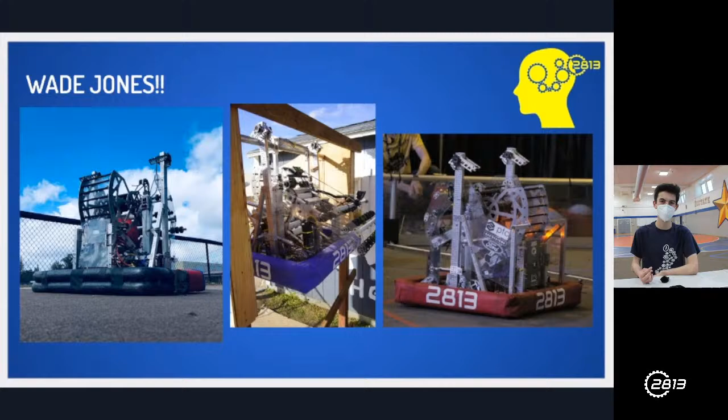So where does our tale begin? That's going to start off in off-season, August of this year, beginning of the school year. Our off-season began with 2 shipping containers and a construction site where our lab used to be. A little bit of backstory: the school had to take down our old lab because they want to make a new lab, and in return we have 2 shipping containers where we have machining, storage, assembly, and robots lab basically. So that's where we are this season.

We used to have a practice field that the school gave us, but it kind of fell over after a couple gusts of wind, so it was not very sustainable. Spoiler for ahead, we got a way better field, this small gym right here, just outside of our lab where we just take out and unroll our carpet every time. That was very nice.

Here are a few images during the off season. Every year we invite new rookies onto the team, and during the off season we teach them the skills they need to know to be useful during the build season, which is when we actually build our robots. So here we have some rookies assembling a table. Here's some other rookies learning how to use the mill. This green machine over here is called a mill. And here are a bunch of rookies learning how to wire the robot.

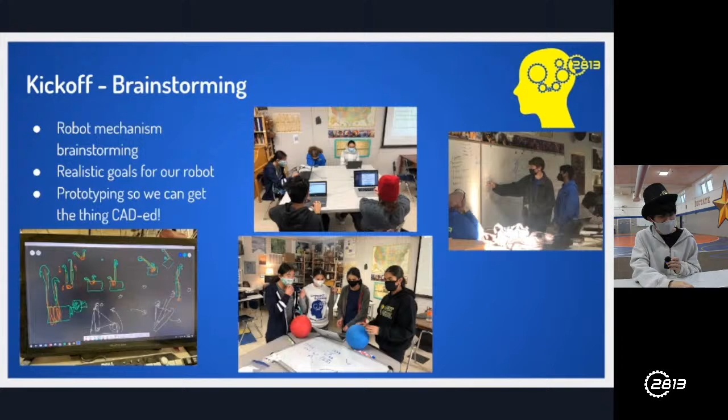Alright. We should probably take our masks off in front of the camera. It's probably fine. Alright, none of the videos are loading. That's a bummer. Okay, well I guess we'll skip these. I was not expecting this to happen.

But effectively, we did a lot of prototypes. We made wooden mock-ups of all our mechanisms. Again, as Yuta said, it's very useful. It allows us to figure out the flaws of our design earlier and then make a better one when we make the actual mechanism out of more expensive materials like metal and plastic, and use real motors instead of drills.

Do you want me to do it? Yeah, I can do it.

All right, so we start off the season with week 1 and 2. Initially what we did was we got the drivetrain done. That effectively just allows the robot to drive on the field. Without the drivetrain, you really can't do anything. And we actually made 2 drivetrains that were completely identical to each other, so we could use them for drive practice - that was the Playground Monkey, the name of our practice bot. We just use it for a lot of practicing.

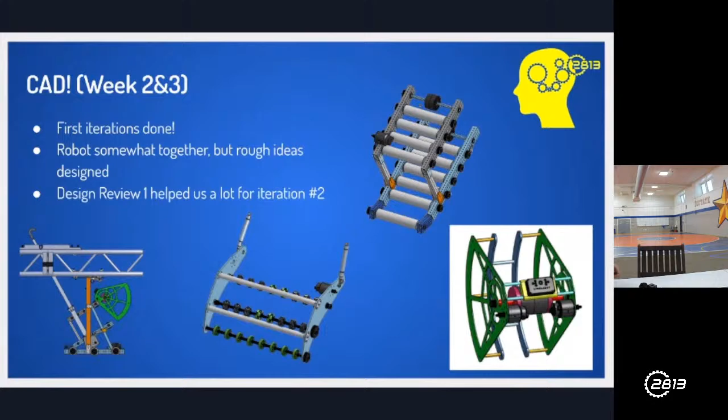Okay, and after week 1 is week 2, that's how numbers work. So next up is week 2 and 3, that's when we started doing CAD. So everything that we've been prototyping leads up to what we design finally in 3D modeling, and then finally what we assemble into the final product, which is our beautiful Wade Jones.

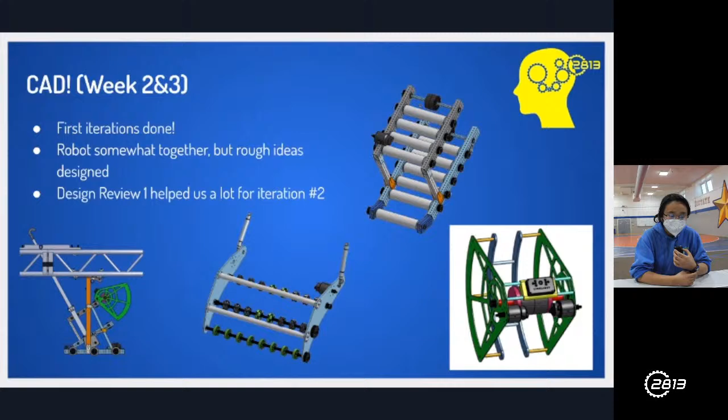So week 2 and 3, we had our first iterations done in the CAD, as you can see here. The robot was somewhat together at that point, which was probably a good time to have a design review, so we could make sure that we're on the right track, we're making things correctly. And thank God for that, because we had a lot of iterations due in iteration number 2. As you can see, things got a lot beefier, so that made our robot a lot better in the long run.

And then a lot of these, especially with intake - I'm going to call that one out - intake had a lot of iterations. We got a lot of people to crash test it multiple times. So that was really fun to do, and a lot of redesign, but it's really cool now. We'll talk more about it later.

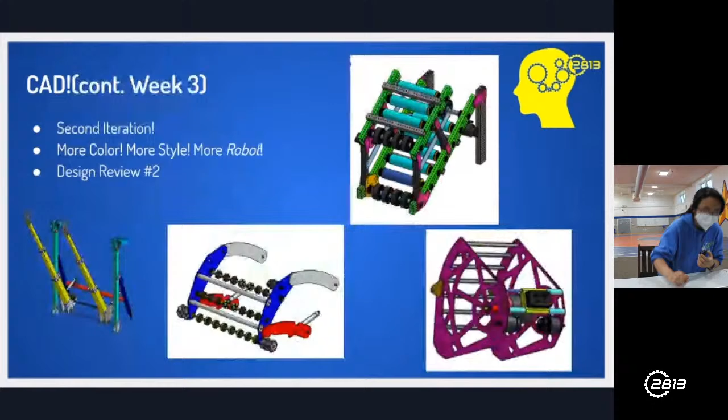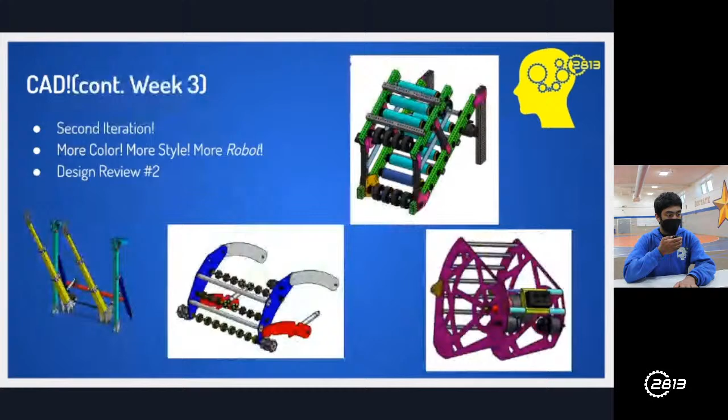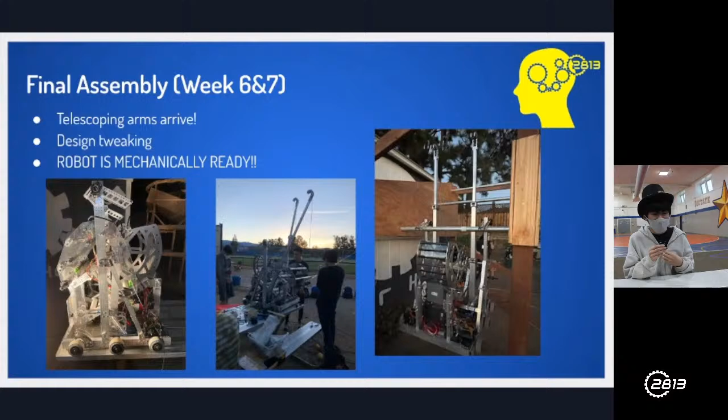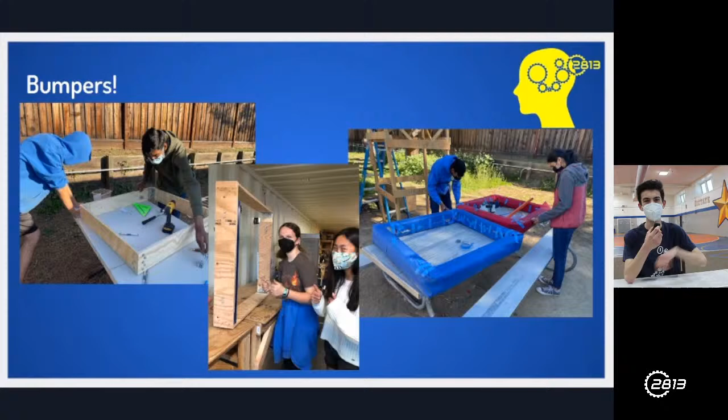Oh, the YouTube videos work. Yes, alright, you want to do it? Yeah, let's get it. Finally, okay, alright.

Just in time too, because these are probably the coolest mechanisms, or at least climb is my personal favorite. So, okay, competition week 0 and 1, that's the time right after build season, because build season is 6 weeks long, and then you have a grace period until your competition, and our competition was week 2. So we had both week 0 and week 1 to keep working on the robot. And because it was mechanically ready, this was basically software's time to take the reins and do what they do best. So we're working - okay, here, look at this one.

There was a sub 20-second climb. Actually it was around 20 seconds, but we could have done a sub 20-second climb, which is really good for us because it's a lot of points. It was really great that we got that consistently down. We ran it like 15 times the day we got it working, so it worked really well, and it never failed in competition. And the next thing up was shooting.

Here's a short video of our shooting.

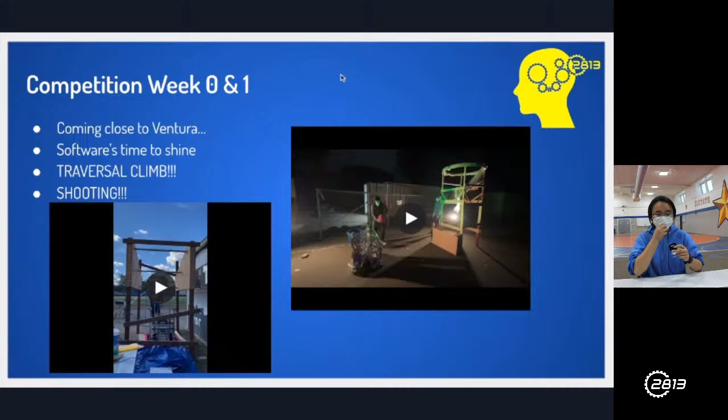We're good. Okay, I think I left off on shooting. I hope everyone got to see that awesome climb right there, but I'll talk about shooting again. So shooting, because we missed the intro video, this structure right here is what the target looks like this year.

At the time, the structure that we have didn't have sides on it, though, so those technically would have made it in, because you can see they just went under the hoop. In competition, they would have gotten in, which means our shooter was pretty much working at the time. We had to do just to make it more consistent, but overall, pretty all right for before competition.

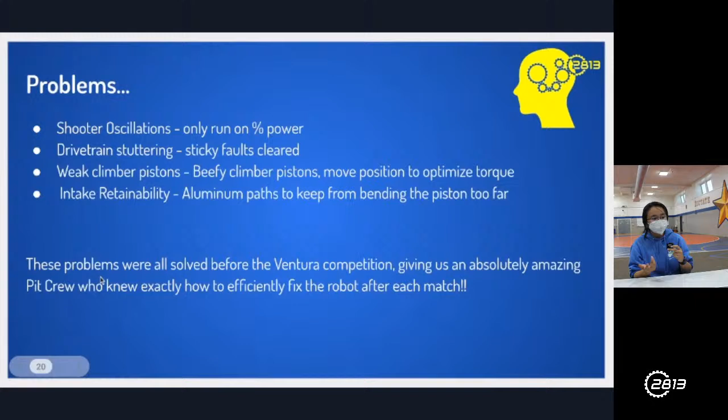All right, so yeah, even though we got some stuff working, there are still plenty of problems. One problem that we had was shooter oscillations. Basically, when our shooter was running, our robot would vibrate a lot, and that causes issues because that results in bolts falling out, and we don't want our robot to self-destruct when we're trying to shoot.

So our solution to that was to only run on a percentage of power, basically feeding the motors a percentage of the power. What we were doing before was running it at a specific RPM, but when we switched to a percentage of power, that made it smoother, and it's a lot easier to implement than trying to get it to a specific RPM. There wasn't much time before competition, so we had to resort to that.

Another problem was that the drivetrain stuttered, and this was fixed by clearing these things called sticky faults. They're basically caused when the battery becomes low, and we have to clear these every time we turn the robot on or replace a battery.

Another problem we had was weak climber pistons, and this was fixed by just getting bigger and better, beefier ones, and we moved the position of the pistons so that we could optimize the torque.

One last problem was our intake retainability. We did a bunch of stress testing, and we also went to a scrimmage. What we found out was that after a lot of collisions, our intake pistons would bend, and that's not ideal if you want the intake to work. So what we did was add aluminum plates to keep the pistons from bending too far.

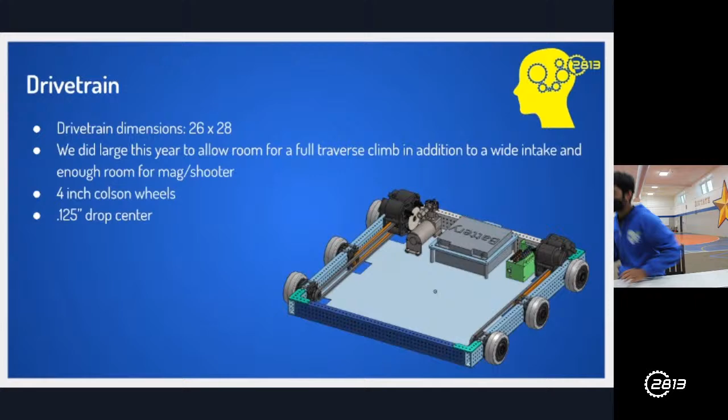All right, cool, let's talk about the specific mechanisms. I'll start with the drivetrain. The drivetrain dimensions are 26 inches by 28 inches, so that's more than 2 feet by 2 feet. It's a sizable robot, definitely nothing small.

You can choose how large you want your robot, you just can't do it too large. So you could have a tiny robot, or you could go to the maximum, which we were very close to, actually. There's a maximum size that your robot can be.

We wanted to do it because we wanted enough room to put all the mechanisms on our bot, including a full traverse climb, climbing to the highest bar, which you saw earlier. We also wanted a wide intake, plus the magazine and shooter. Those take up a lot of space, so we needed to account for that and make sure our bot had enough space.

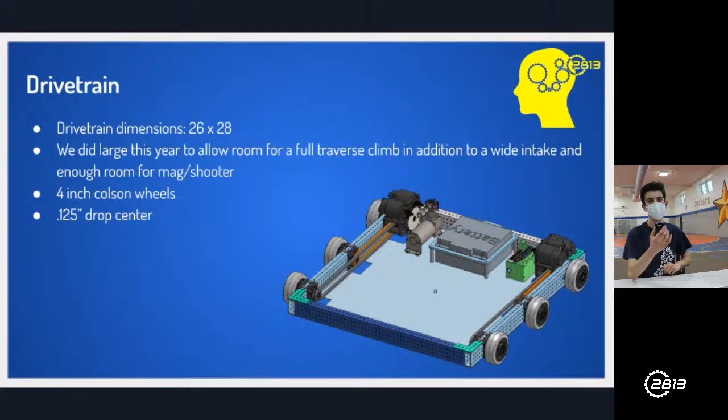We also have some 4-inch wheels on the drivetrain that are pretty good, and we have a drop center. Effectively, that means the middle wheel is a little bit lower than the other two wheels, which allows us to have a little less friction on the field. So when we turn the bot, it doesn't make the wheels want to cry, for lack of a better term.

Oh yeah, the gearboxes. We actually bought the gearboxes, and the reason we did that is because they're simple, we know they're going to work, and we can focus our resources into making unique, innovative mechanisms like our climb, which was a lot harder to do. We wanted to make sure we had a solid foundation for the drivetrain before going anywhere, and it works - that's kind of what we're looking for.

It also goes 15 feet per second at its maximum speed - that's really fast. So yeah, that's about it. I think there's a lot of technicals in here for all you FRC nerds, but effectively we have a lot of flexibility with the drivetrain, and it's very consistent and works really well.

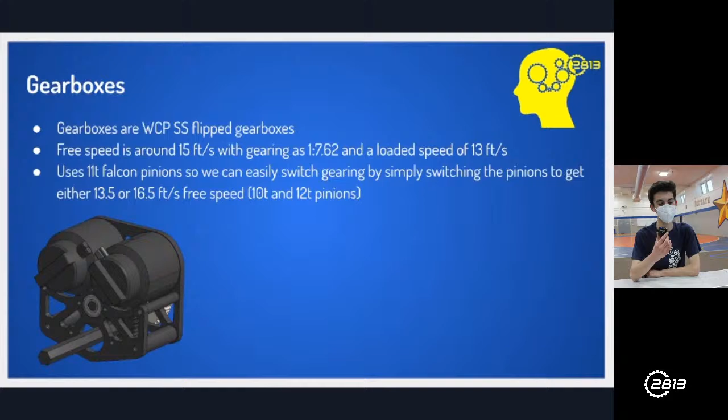All right, intake. Pranesh, would you like to do intake? Sure. Epic. Okay, so intake. Intake's pretty cool, I'll say this. These balls are huge, and because of this we wanted a wide intake because it's easier to pick up balls that way. So pretty much how our intake works is it's a 4-bar intake.

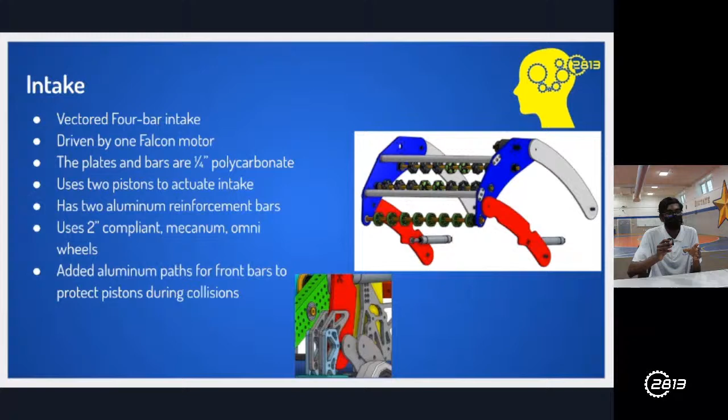If you look at the red bar and the white bar, those are the four bars. This allows our robot to essentially store our intake above our bot in starting configuration, because we need our bot to be within the specific size parameter at the beginning of the game. Then with our pistons, we deploy the intake, which allows us to pick up balls. The entire intake is driven by one Falcon motor, and the plates and bars are all made out of polycarb. We have these aluminum pads that allow the pistons to be a little more protected.

And yeah, we use compliant wheels and mecanum wheels. The mecanum wheels are basically these wheels that allow the ball to be centered so that it enters our magazine a little more smoothly.

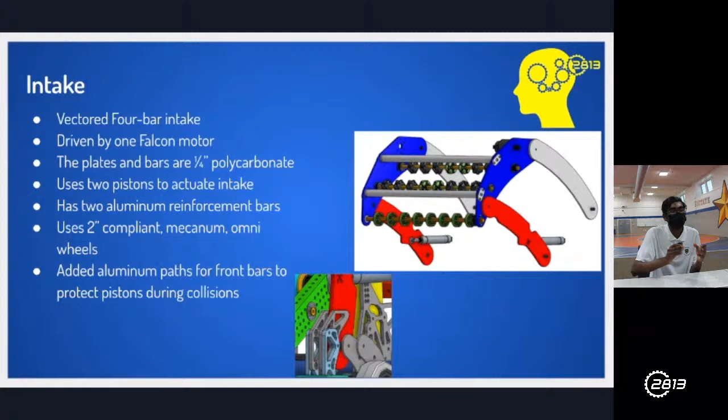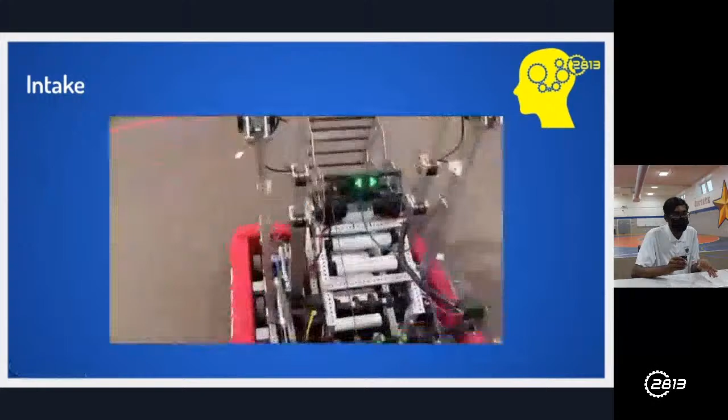Here is our intake being deployed. As you guys saw, it was on top of the magazine, and then it was on the ground. And here's the bot just driving around with the intake deployed.

Okay, now magazine. Ah, yes, my proud creation, my baby. All right, here we go. So, magazine. My mask is falling off, great.

Basically, the magazine is needed so we have a way for the ball to get from the intake to the shooter. The magazine is the mechanism that allows us to do that. For this year, we used PVC rollers - plastic circular roller things. You can kind of see it here. We have a bunch of them, and they roll to move the ball from here to here, and then we have the shooter attached here.

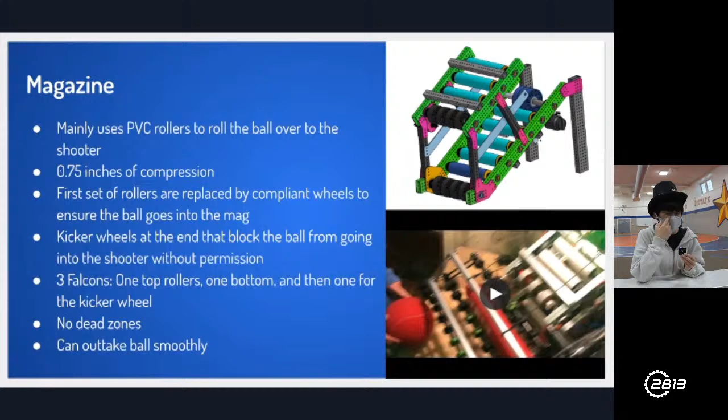So, to get a little more into detail, there's 0.75 inches of compression on the ball, for the FRC nerds, yes. The first set of rollers are also wheels instead of rollers because we wanted to make sure it has enough torque to get into the magazine to fully ensure it's going to go in instead of doing weird things. Then right here, the last one, instead of having a roller, we made it into a large compliant wheel - just a very squishy wheel, but large.

Yeah, this is basically to stop the ball from going into the shooter before we want it to. That was a problem we had in our last bot, and it works surprisingly well. So yeah, I'm pretty proud of my creation.

It's run by three motors: one on the bottom, one on top, and then this thing is run separately so that we can put the balls in when we want to shoot.

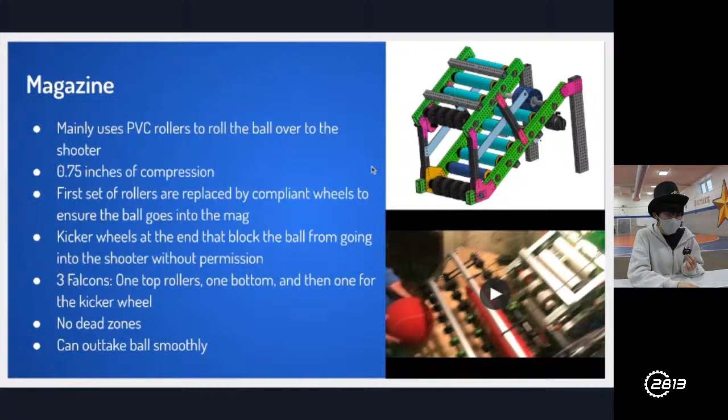As far as I know, there are no dead zones. Hopefully there are no dead zones.

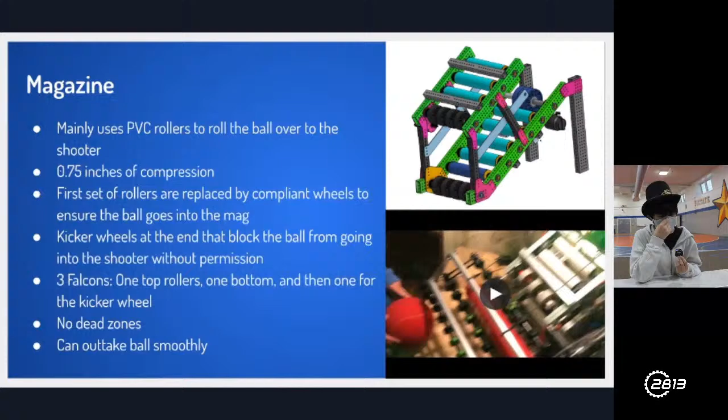Another thing to note, we can outtake the ball smoothly as well, because that's a major part of the game this year. If you intake the wrong color ball and shoot it, that gives the opponent points, not you. So if we pick up the wrong color ball, we want to be able to release it, and it can do that. Overall, it works, and I'm pretty happy about it.

This is a video of when it first ran. So that's what it does.

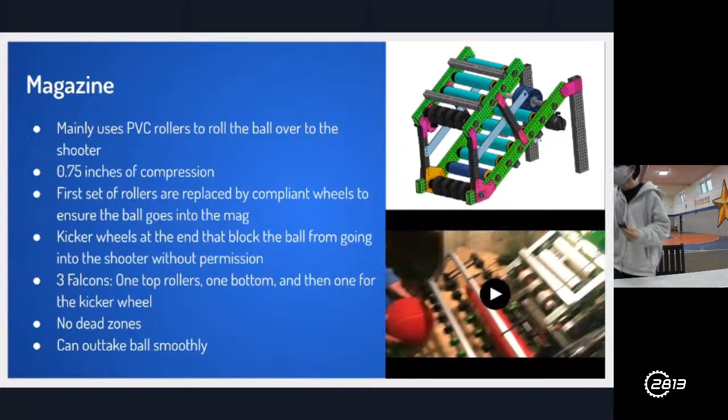That was the first time it ran, and guess what? I made it, but I wasn't there. Oh well, all right, here you go. Tisk tisk, could not wait to see. He just couldn't watch, couldn't be around when his baby was made.

Anyway, all right, time for my child. I made the shooter this year.

To go into specifics, the flywheel is made of a 4-inch urethane wheel, or two of them, and one 4-inch aluminum wheel between them. That's mainly to make it really heavy, because the heavier the flywheel, the less time it takes for the shooter to go back up to speed. It's kind of some inertia stuff going on there.

As Abhinit said before, we use percent power instead of RPM control because PID tuning was having a little bit of trouble. We were having oscillations, which means our shooting wouldn't have been consistent if we used that at the competition. That is a future goal though, we're working on it, and it's gonna work. I have confidence.

Also, future goals for the shooter: at the competition we had a fixed speed, which means we could only shoot from one spot on the field. But our goal for the next competition, which is in two weeks, is to shoot based on auto aim.

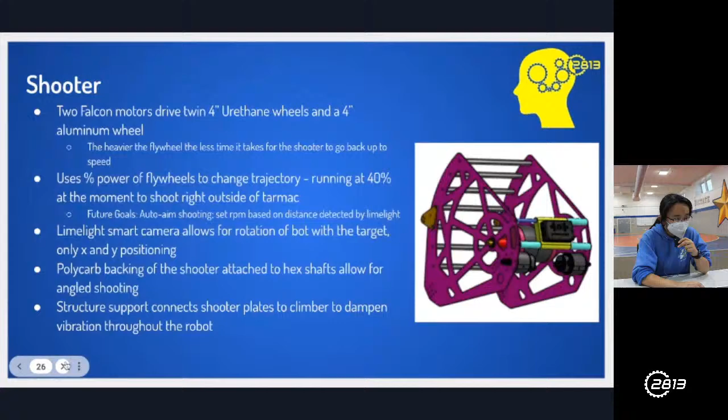And of course, what is this? Oh right, we added in a new thing recently, a structure support here on the shooter, which would dampen the vibrations we were talking about earlier. Basically, when we ran this flywheel, it would vibrate the robot a lot, so we connected it to the climber mounting piston structure, and that dampened the vibration a lot. That was really helpful.

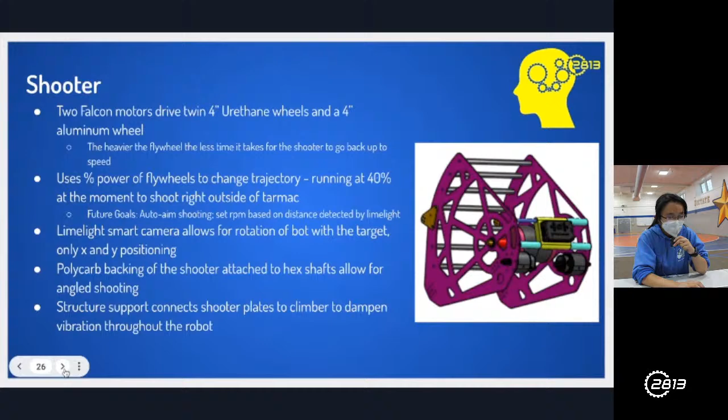Right, and a little bit of demonstration. I think this is the same video I showed before, but this is us shooting for the first time.

Pretty neat. And then I just added this in here because we went to the competition last week, so we have some footage of us shooting in the actual game. Hopefully this works. No! There we go.

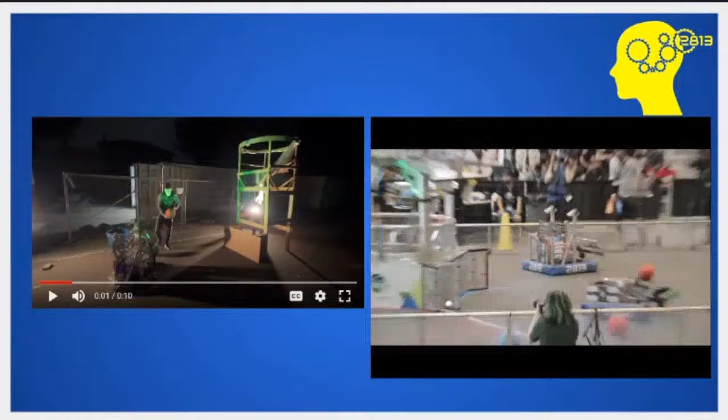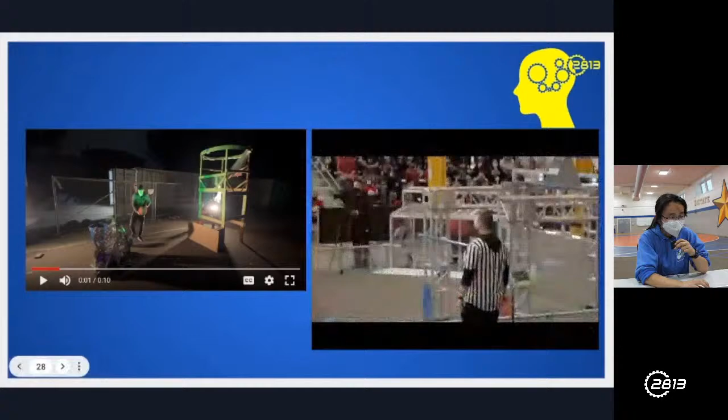Look at that beautiful shooter. So consistent. There we go. All right, climber next, Caleb.

All right, let's look at the climber. So climber is, in my opinion, the coolest mechanism on the bot, but I also designed it, so I might be a little bit biased. Hallie agrees, it is the coolest thing.

That's really good. We went for simplicity for this climber, and it worked out because our climber was very consistent at competition. Almost every match we were able to at least climb onto the second bar, most of the time we were able to get it onto third and fourth, but sometimes we ran out of time, because it does take 20 seconds. So if the match ends in 15 seconds, you're not going to be able to get to the full climb.

So I think the best way to do it is to just look at the videos. Oh, we showed video earlier, right? I forgot about that. So yeah, basically we get onto one bar and then we allow it to latch onto the next bar, and then we pull it up. You get onto that bar, latch onto the next bar, pull up, get onto that bar, and now, ta-da! We're on. We've climbed. Boom.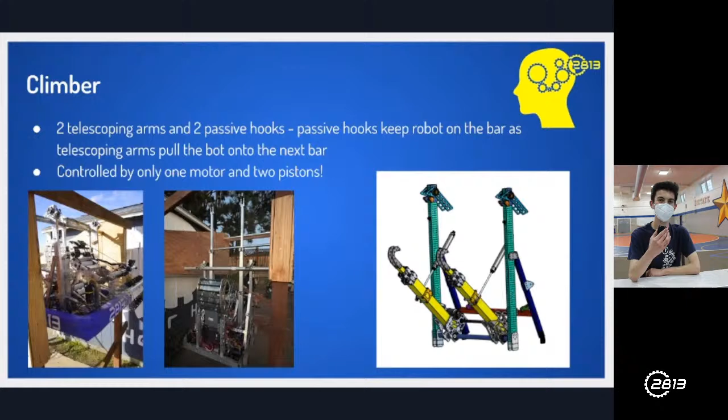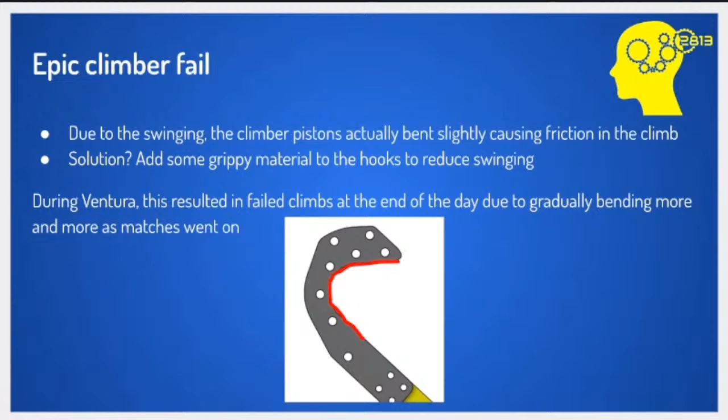But the climber was not perfect. Our climber swung a lot, and due to the swinging, the climber pistons, just like the intake pistons, bent a little bit. It was barely noticeable, but it caused a little bit of friction in the climb, and that meant that they weren't able to extend as fast or as easily. That's a problem when you want to climb fast, or if you want to climb, period.

It had a few issues at the very end of our competition where we were only really able to get that second bar because they couldn't extend all the way to the next bar. So we realized the swing is kind of a problem. For the next competition, we're actually going to add some grippy material to the hooks to see if we can prevent the swinging a little bit and see if we can do anything about that.

And then, towards the end of the day, it extended more and more slowly because the pistons were just slowly getting bent every time we hung. So it's a little bit of a problem, but we're working on fixing it. We know exactly what needs to be done, and you bet we're coming in hot for our next competition.

All right, I'll give this to Albany. All right, now it's time to talk about software. Let's talk about vision.

So there are a few things that vision does. One thing it does is its auto aim. I think Hallie mentioned this earlier. Basically, the bot rotates such that it faces the target, so that means there's no need for a driver to worry about manually aiming the robot. That increases how many times we can shoot during a match. It basically just makes us more efficient during the match.

And a future goal is to be able to make the shooter flywheel spin at an optimal RPM, so that the balls shot consistently go into the target. We would use a distance calculated by the limelight in order to determine the optimal RPM.

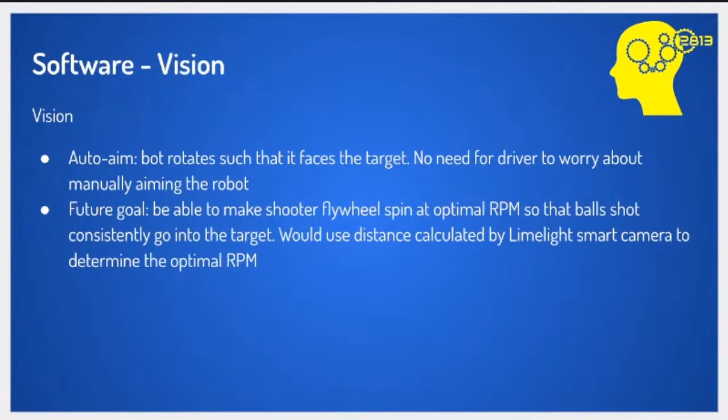All right, let's talk about autonomous. So autonomous is basically a 15-second period at the beginning of each match, and as you can probably tell, the robot moves autonomously, like there's no driver control; it just moves on its own.

And right now we have a 2-ball autonomous routine, and what that means is that the robot drives forward a certain distance to intake a ball, and then the robot does a 180, and then it drives forward a certain distance, and then it shoots 2 balls.

Just for context, before each match the robot is preloaded with 1 ball, so we have 1 ball at the beginning of the match, and then another ball that it intakes, and so that's 2 balls shot.

A future goal is to have more complicated autonomous routines for more flexibility during matches at comps. Our 2-ball is simple and it works, but having more would mean we have more options for the beginning of our autonomous and more points scored. For our next competition, a 4-ball autonomous would be quite nice.

Now we come to intake for software. We have 2 buttons. One button is for intaking the balls. The intake automatically actuates upon pressing the button, meaning it goes down, so the operator doesn't have to worry about manually deploying it. That's 1 less button the operator has to worry about.

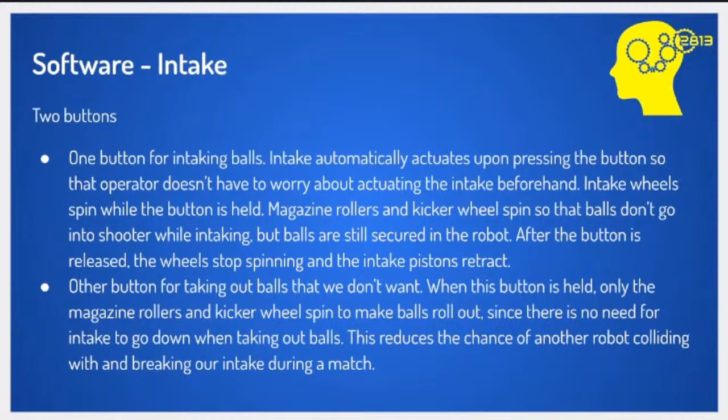The intake wheels spin while the button is being held, and the magazine rollers and kicker wheels also spin so the balls don't go into the shooter while intaking, but balls are still secured in the robot. After the button is released, the wheels stop spinning and the intake pistons retract.

The other button is for outtaking balls that we don't want. As mentioned before, if we shoot wrong color balls into the target, the opponent gets those points, and we don't want that. So when this button is held, only the magazine rollers and kicker wheel spin to make the balls roll out, because there's no need for the intake to go down and spin outwards when outtaking balls, and this reduces the chance of another robot colliding with and breaking our intake during a match.

Next up is shooter. There's 1 button to get the flywheel spinning to a default RPM before actually shooting, and this allows the flywheel to get up to speed so there's less wait time for shooting. The other button is to shoot.

Another button is to shoot automatically. This button first aims the robot, then sets the flywheel RPM to an optimal speed for the distance the robot is from the target. As mentioned before, we don't actually have this yet. This is a future goal.

After this optimal speed has been reached, the magazine rollers and kicker wheel spin so that the balls are shot from the robot.

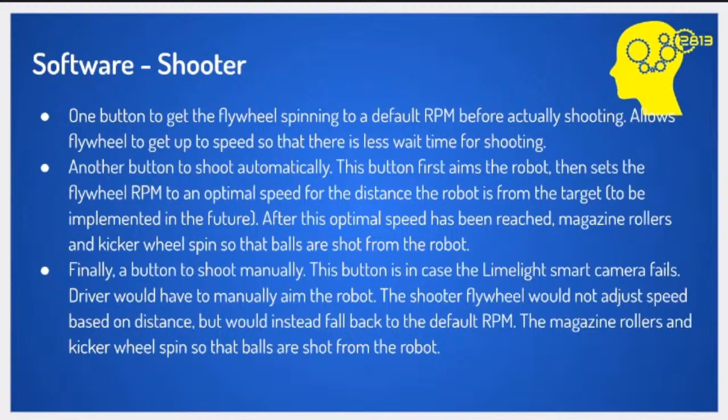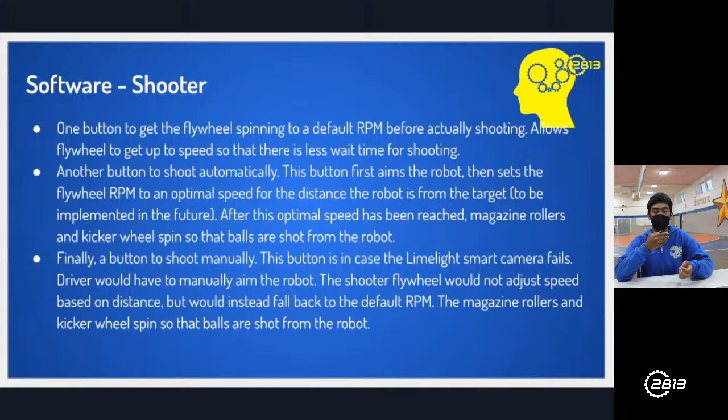We have another button to shoot manually, in case the limelight does not work. For example, it could be incorrectly tuned for the lighting, or there could be other issues going on. In this case, the driver would have to manually aim the robot since we wouldn't have the auto aim provided by the limelight. The shooter flywheel would not adjust speed based on distance, but we would just be shooting at the default RPM. The magazine rollers and kicker wheel do the same thing as in auto aim shooting, so the balls can get out of the robot.

Next up is climber, which has 3 buttons associated with it. The first button extends the climber so the hooks are in position to get onto the mid bar. Another button is to retract the climber once the robot has been lined up with the mid bar, and pressing this button means we're hanging from that first bar, the mid bar.

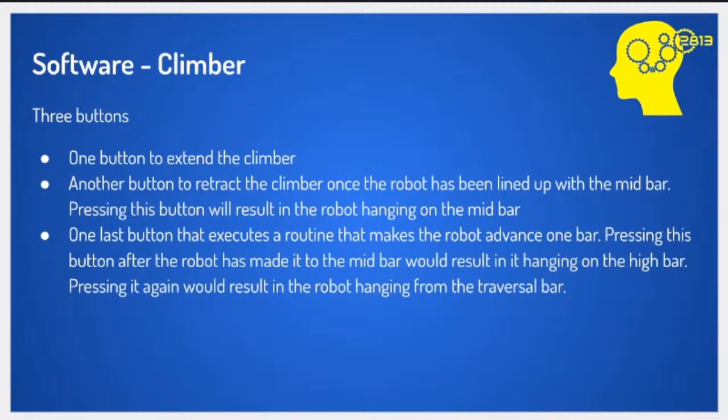The last button executes a routine that makes the robot advance up 1 bar. Pressing this button after the robot has made it to the mid bar would result in it hanging on the high bar, and pressing it again would result in our robot hanging on the traversal bar, which is the main goal. This was done so the operator has less to worry about. Instead of doing a complicated routine to extend it a bit, make the pistons go out, then extend it even more, there are just 3 buttons the operator has to press to get our robot onto that traversal bar.

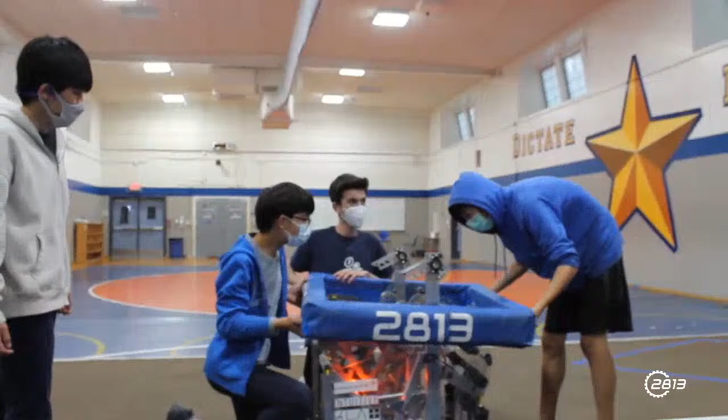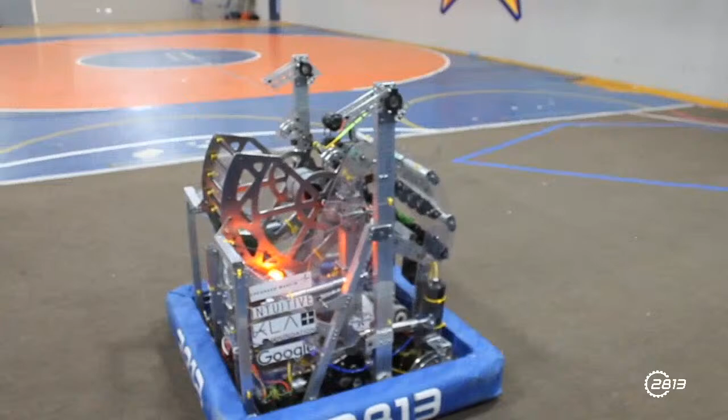Okay, let's see if we can swap cameras. Yes, let's get our beautiful bumpers as well. Okay, everyone say hello to Wade Jones. Hello, good job, you passed the test.

Okay, can we get it running? Yeah, let's do the thing. So we won't be able to climb here because we're in a slightly different space, and our climbing hangar is in our outdoors lab. But we can do everything else. We can intake, we can shoot. It'll be pretty chill, and show what we're about.

All right, we're just waiting to get connected here. I don't know how good the angle is, but we can point out the climber, even though we're not gonna run it. Here, come bring the camera closer. That's fine, I don't think we can bring the camera. I take that back.

We have these hooks here that are spring-loaded, and you can kind of see here, we also have these hooks over here. Those can extend and grab onto the bar. They can't extend right now because we've forced them not to, with a zip tie, because they like to extend by themselves. So we basically told them, no, you're not allowed to extend. But normally, during the match, we don't have to worry about that — we want them to extend when we're climbing. Normally we wouldn't have to zip tie them, but right now we do.

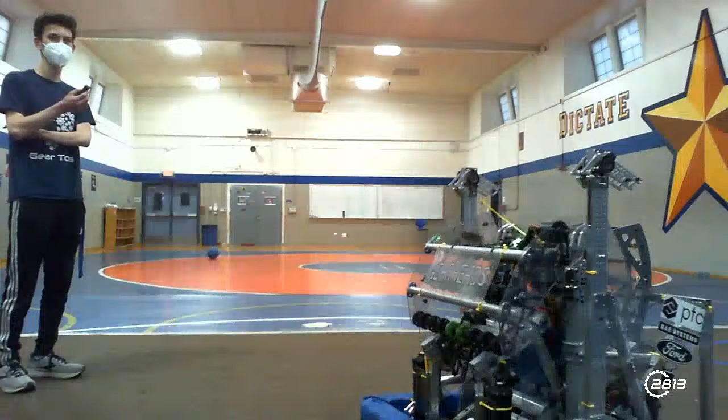We're doing a shoot. Funny joke.

Shooter having issues? It won't fill up, that's not fun. Yeah, we just made repairs to the bot too, so that could have affected it. Oh, it's a controller? Okay, cool, glad it's not the shooter at least. I like it when mechanisms aren't broken, that's pretty ideal usually.

Oh, that's a camera. I didn't think about that.

Let's do a short interview. All right, what made you join Prospect Robotics? Hallie told me to.

Hallie, what made you join Prospect Robotics? I really wanted to drive the robot, and wow, look at that! That's what I'm doing today.

Hey Pertol, come here, you're gonna be interviewed. Why did you join Prospect Robotics? Because being an operator is my dream job, it's what I want to do for the rest of my life, and that's why I'm here. Oh my God, I'm doing it too. I'm fulfilling my dreams. Congratulations.

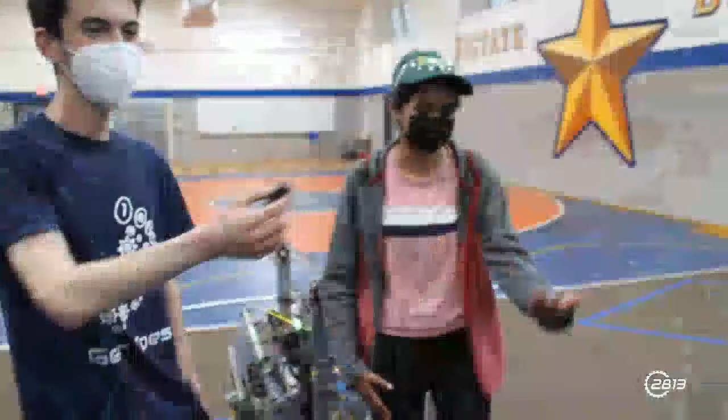Who else can we steal? Hi Jacob, why did you join Prospect Robotics? I don't know. You just did. All right, valid. I refuse to interview Yuta. What? No, can't do that. Give me the mic. No.

Issa, why did you want to join robotics? I joined robotics because it's fun.

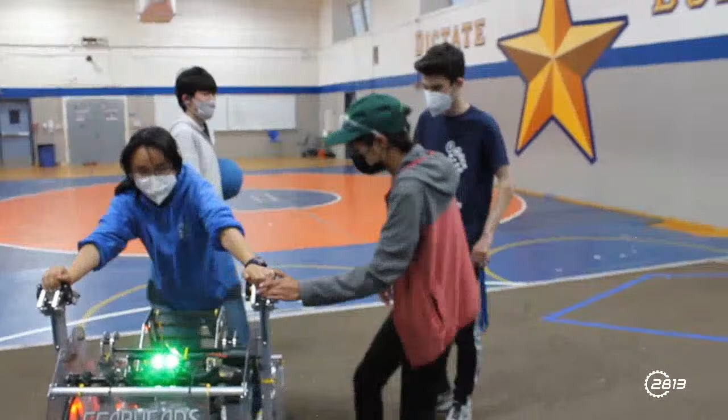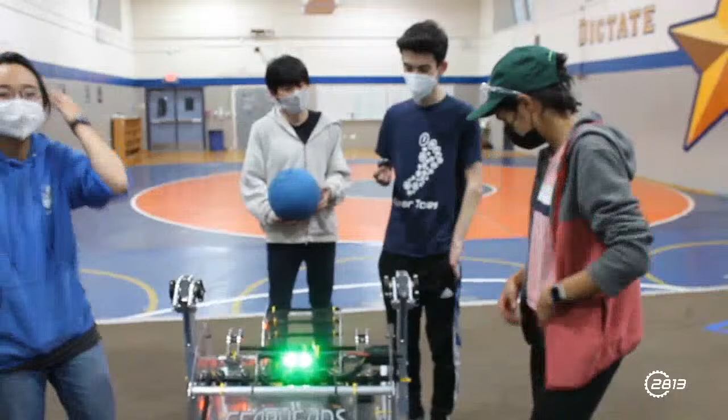We're chilling. Hi, can we try this again? Yes, let's try it again. Take two.

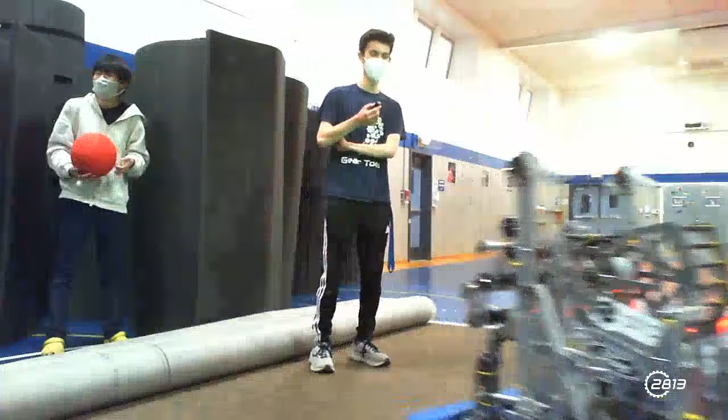Oh my! Y'all literally shot the... let's try not to kill a rig. No, let's get. Okay. Boom.

Shoot it maybe like that way. It's not spooling. Oh wait, something happened. Oh now it works. Wait, hold on, I'm going to try just spooling. Is spooling not working? Probably a controller issue. Sad.

Cool, let's intake balls again guys. So yeah, just like that, we have 2 balls. Pretty cool. Unfortunately, yeah, we're...

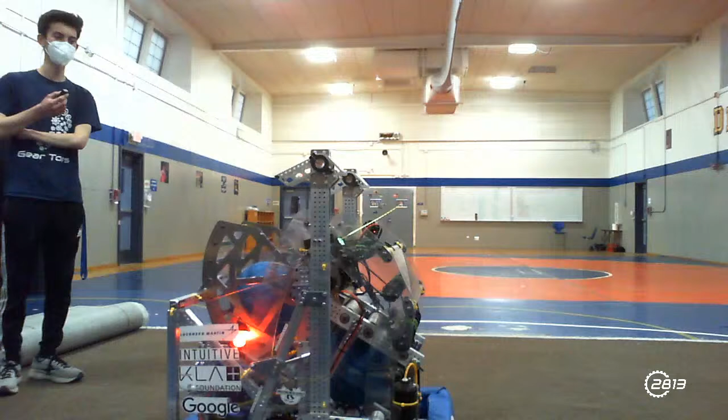Controller issues. Do you want me to fix the ball? Alright, let me get that out of here. Alright cool, yeah we can also outtake. Unfortunately we're having a few issues, but you got to see 1 or 2 shots. We'll fix the controller later. But the robot works, so yeah, I think that's about it for the live demo.

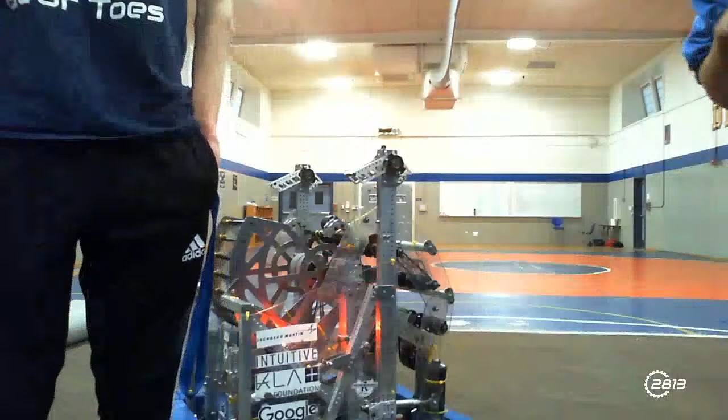Queuing. Oh yeah, do you have questions? We can do a QA. If you have questions, let us know. I can check the YouTube chat right now, or Kenny can tell us.